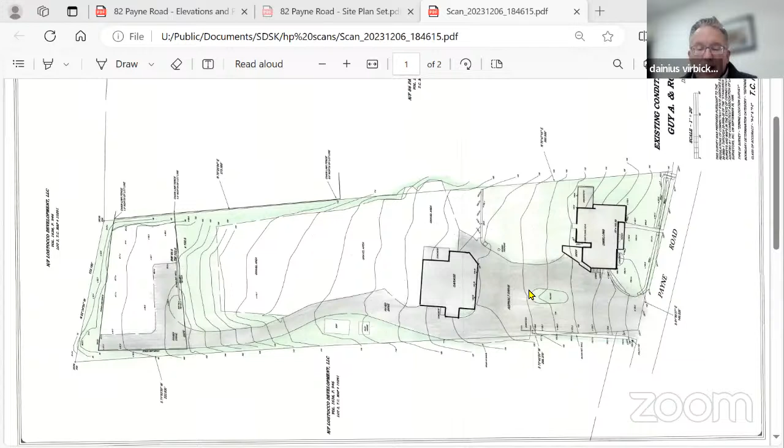The driveway is shaded here on the south side of the property. It's a fairly steep driveway as it exists. As you enter off the site, it's about 13% right at the intersection with the road, steepening up to 15%, with an average grade from the road edge to about 100 feet in of about 11 to 12%. So we've got a bit of a challenge working with the grades here, but on the bright side, this site has been operating with vehicles coming and going on this driveway since the 80s, so it shows that it can be done.

I'll scroll down now to our proposed site plan. The first thing you'll note, it looks kind of the same, but a little bit more organized. Again, the orientation of the site, Payne Road is on the right-hand side of the screen, north is facing up. We first have in this area the existing home,

portions of which will be removed in the rear to make way for this addition, about 3,000 square feet in footprint size, with full height access from the rear of the building, overhead doors, and then some double doors on the south side of the building, allowing access to a mezzanine area. So the total addition is about 4,500 square feet.

We've organized some parking spaces, making first use of an area we can level off for the doorways. We've proposed our handicap parking space. As an alternate, we can easily place a handicap parking space down in the back as well. So we have options, but on this particular layout, we have handicap fairly close to where person doors would be located, as opposed to an overhead door and a person door.

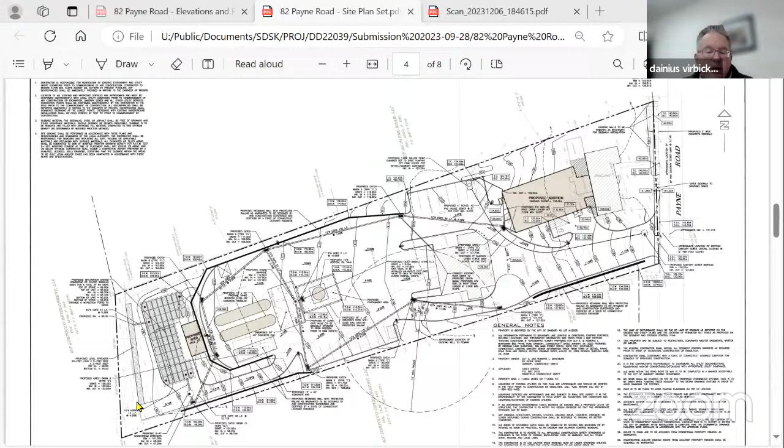I'll share with you now our landscaping plan. Landscaping was prepared by A2 Land Planning, that's Abigail Adams. She's well-versed in the city of Danbury with respect to landscaping, and she has proposed that we maintain the front yard of the property in its current state, so that it views as you're passing by as a residential property, with no visible changes to that.

As you enter into the site, she's proposing some landscaping on the green areas alongside the proposed addition. That'll help change the appearance of the site by adding buffering to the existing repair building located on site. There's also a whole host of plantings around the parking spaces on the northerly and southerly property lines, and along the northern boundary of the property. So it's a pretty intensive landscape plan.

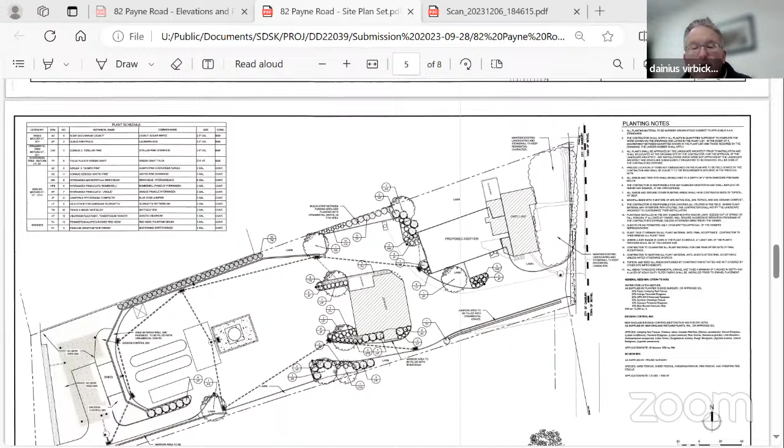And the remainder of the sheets are erosion controls and detail sheets. What I'd like to share with you, though, since you're probably interested, is the appearance of the proposed building. So I'm going to look to share the architectural renderings as well.

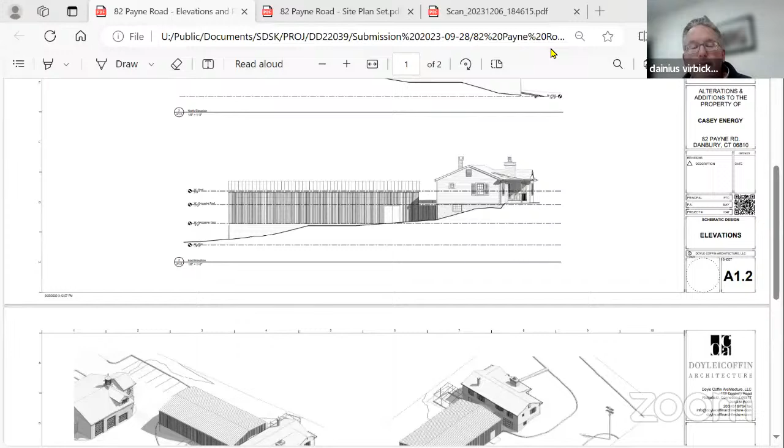If I could find those, that'd be great. There we go. Is that popped up on your screen? Yes, it is. Terrific. Okay, although I think I got these backwards on the plan.

As we look at this drawing, this bottom elevation depicts the existing home on the right-hand side of the structure, with a lower metal building tucked in behind the existing ranch-style home. The intention is to match floor elevations to the degree possible with the basement of the existing home. This view is standing on the south property line, looking northward.

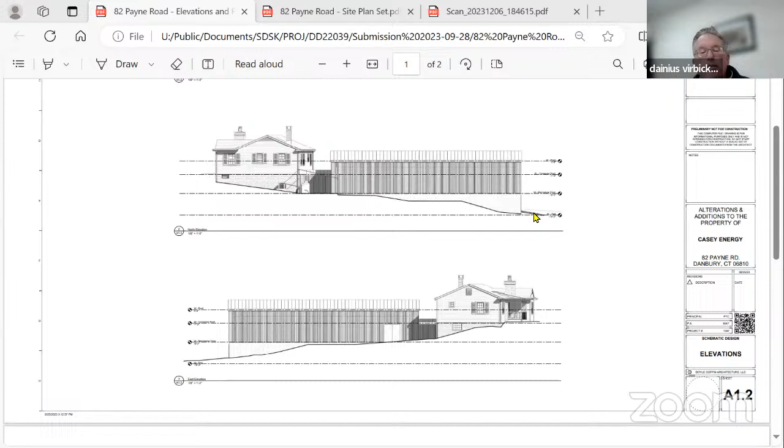This next view would be standing on the north property line, looking southward. And then this is the rear view. As I noted in my presentation, we have an overhead door proposed and a person door located immediately to the left.

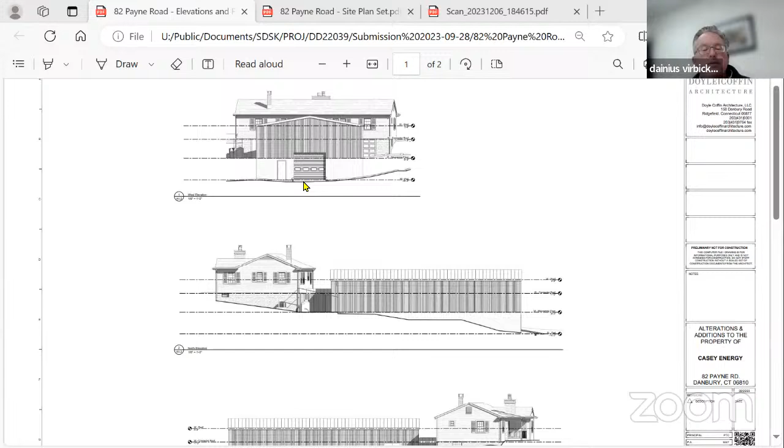We've got some isometrics as well, which should help give a better understanding of what this structure will look like. Again, in this view, we've got the home and Payne Road along the right side. This metal structure is tucked in completely behind the ranch home. Similarly, from this view shed, you can see where this metal structure is tucked in and lower than the roof line of the existing home.

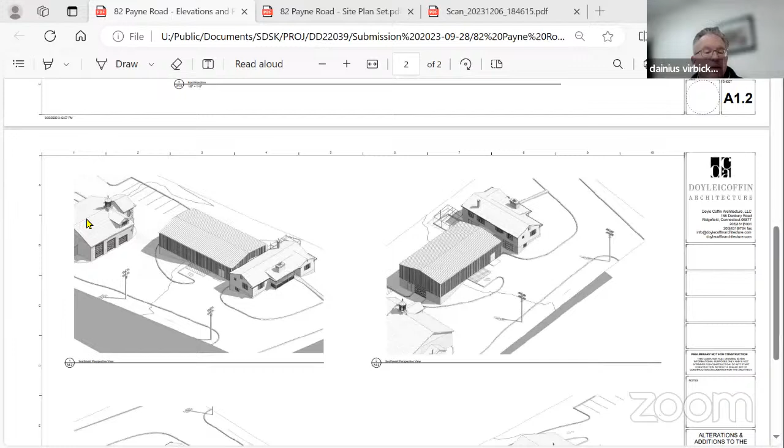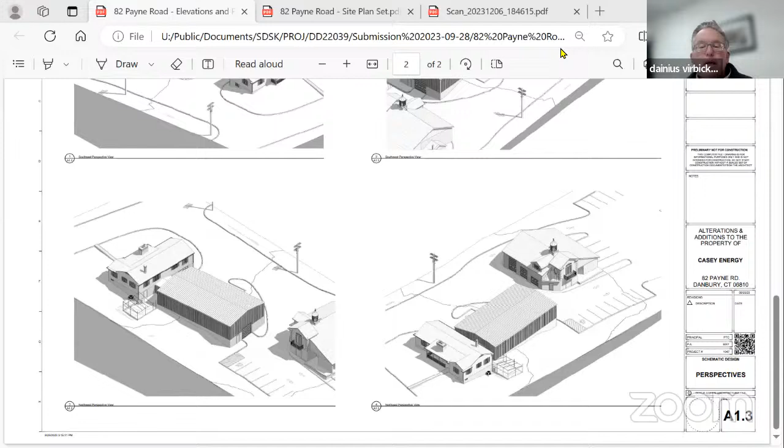And we've even got a little bit of the existing automotive repair building indicated on this view shed as well. We've got some additional views from above, from different angles. I think, as always, a picture helps tell a better story than me chatting along. At this point, I think I'm finished with my presentation. I'm happy to answer any questions, or I can defer back to Mr. Beecher, and he can continue on as well.

Commission members, any questions for Dainius at this point? I got one. Go ahead, Mr. Sylvain. No, it's Kevin. Oh, I'm sorry, Kevin. Go ahead, Mr. Haas. My apologies.

The space between the two buildings for the tractor trailer to get in and deliver propane and oil looks kind of tight. Is it not? We've run our truck turning templates throughout. It's a good observation, but the delivery trucks can make it into the site and around the back and out of the site without any issues. We've also run not only the larger delivery trucks, but also the smaller SU-30 type trucks used for deliveries to customers. And as a final option, we've run the template of the Danbury hook and ladder truck, basically the largest firefighting truck they've got, and that can make it through the site without issue as well.

Okay, Mr. Haas, that was one of the comments in the staff report, so we're going to be providing more information to illustrate it for you. Okay. Correct. Thank you, Tom. Any other questions for Dainius? Ellen does. Sorry, I don't have her on. Go ahead, Helen. I'm sorry. I'm sorry, I was on mute.